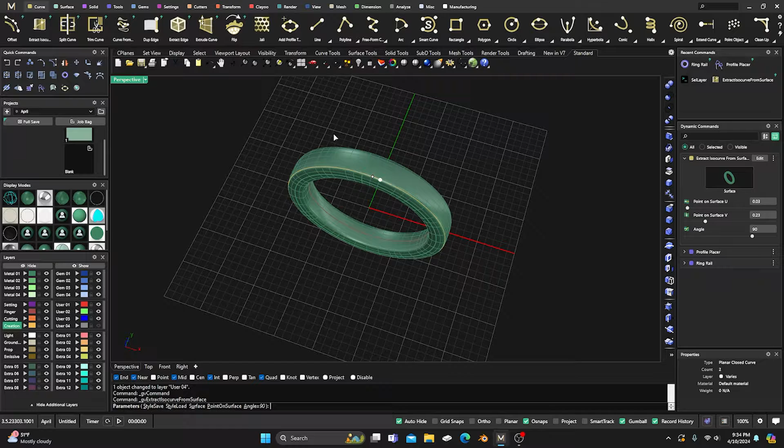Let's go to our yellow and go to curves, and we'll extract an ISO curve right here. Extract ISO curve, and we'll put it in our center at the 0.5.

And then we'll go in and grab some gems. We'll go to gem on curve and select our curve, and then hit enter, and it'll place our gems out there.

We'll just go ahead and click on this dot right here and type in 0.75, and now it's just here. You can do it all the way around if you want, whatever.

We'll go to round, and we'll go down here to just straight baguette, right? And then we want to get these baguettes where we want them. We'll drag this out to maybe 2.25, and we'll close up this.

It's a 0.1. Actually, that's probably what you want, a 0.1. But we'll take them a little closer here.

And we'll go ahead and slap them down to our table here, and we'll take them in a little bit further too, just for...

Let's go to ghosted mode. Let's see, let's go to wireframe here. What do we got here? Yeah, that looks okay. Somewhere like right around in there. And then we'll just select that.

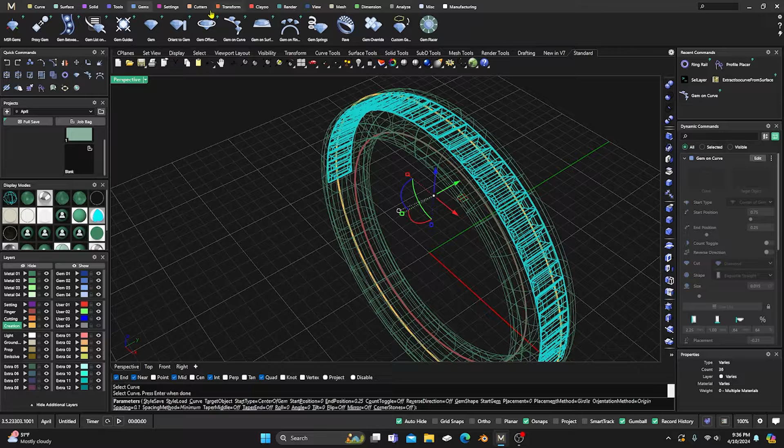We'll select our gems, go to cutters, and we'll put a channel cutter on there. And of course, this one you definitely want to change it from round to flat.

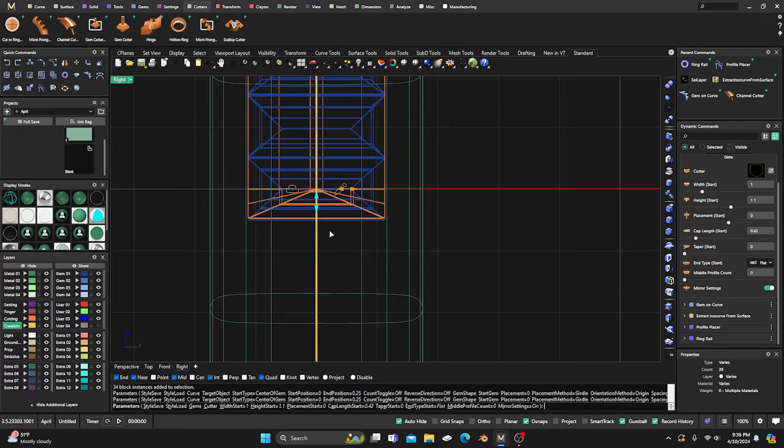Because you don't want rounded on a baguette band. We'll take this in to where it just barely covers up there, and we'll bring in our width.

So it's about 88%, 80, about 90%, somewhere around here should be okay. And we'll go ahead and change this cutter something a little straighter, but not real angled, right?

We want it pretty much, yeah. And we'll bump this out just a smidge. All right, so it comes in just a little, so this will go right along the edge here, and we got a little bit to cut there.

And we need to go to our front view, and we'll drag that all the way up, and then bring it down something like this here, and get it ready for our cutting.

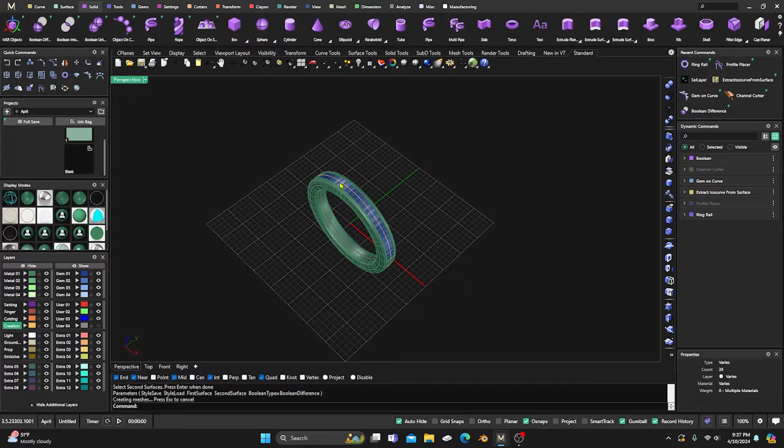And I think that should be okay. So we'll go ahead and take that. We'll give it some shading here, go to our solid, go to Boolean difference. We'll go from here, enter, and enter, right? And we have our baguette band, right?

Last thing you need to do is just go ahead and put cutters on that, but we won't do that right now because we're going to put baguettes in there, right? Tapered baguettes.

So let's go ahead and take this, and we'll go ahead, hold down Alt, and duplicate this over to here, right? Just get it out of the way here.

And let's go ahead and take these, and we'll change them to this layer here and turn them off. And the reason why we didn't make that cut is because we're going to need a curve in there.

So we're going to take that yellow and go ahead and change it to gray and get rid of it. And we'll take this one for right now and just hide it.

Okay, so we want to extract a curve from here, but we want to go all the way over to this end, right? So this is surface, so it's three different surfaces here.

One, two, three, well, four, five different, at least four. So we want to make sure that we can get everything all lined up, right?

So this one might be a good one to use, the old extract ISO curve, and then we can go in here, switch it to our V direction.

And then we can just snap it right there to that end intersection, right? So we have that one in there, right?

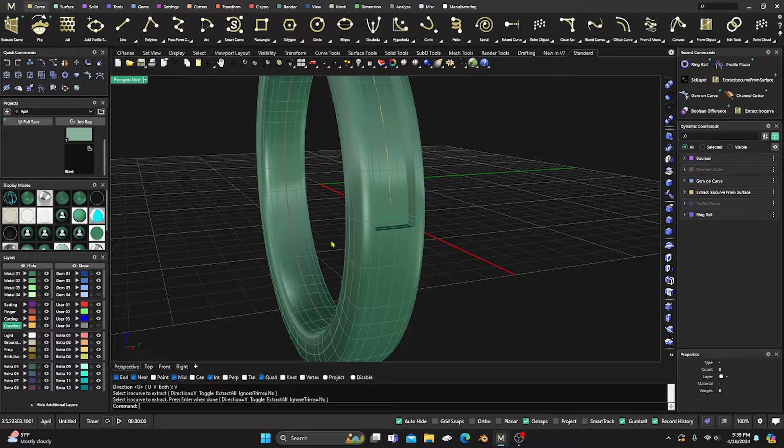And I don't think that you can mirror this over. We'll try. I don't think it'll work because the surfaces could be just minutely off, and if they are, it won't work. But we'll go ahead, we'll try.

There it is, okay, so we have that. Let's go ahead, take all our yellow curves and join them together. Let's complete that. Okay, it worked.

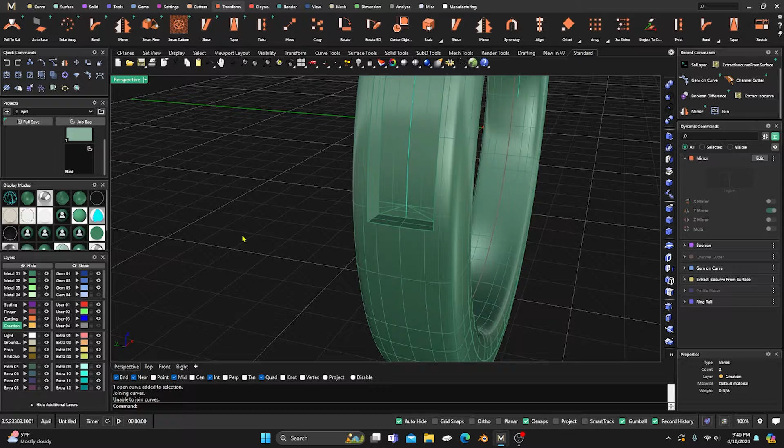Let's see, two curves joined into one open curve. Okay, so this one did not join like I thought. Well, we'll take it, we'll try it one more time just to make sure. This curve here, and we'll try to join. Unable to join. Yeah, that's what I thought. You'll have to extract it.

So let's go ahead and just get rid of this one, and we'll go back to extract ISO curve, select this surface here, and we'll do right there. Then we'll select that one and select this one, and we'll join those together.

Two curves joined into one open curve, so it's all one curve now, right? So what we can do now is grab that curve and go back to make sure I grabbed it. Ding, there we go. Type in L-E-N-G-T-H, length, yes, and it gives us that length of that curve.

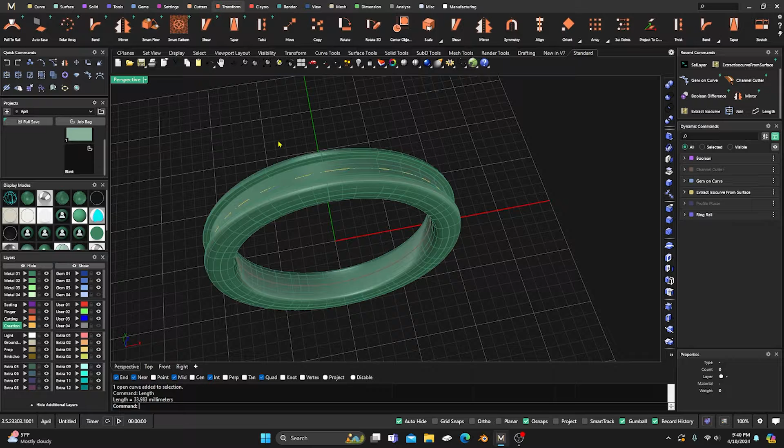So what we want to do is grab another curve, just click it anywhere in space out here, and then come down here and highlight this number, copy, come back down to the line, right click and paste. Oh, I locked it in the wrong direction.

So let's go back. Let's go to our line curve. We want to just click anywhere out there, and then we'll scroll till we get this here. Copy, come here, paste, and then just draw it straight out, right? Holding down shift and lock it in, right? We'll take this one and bring it over to this side here.

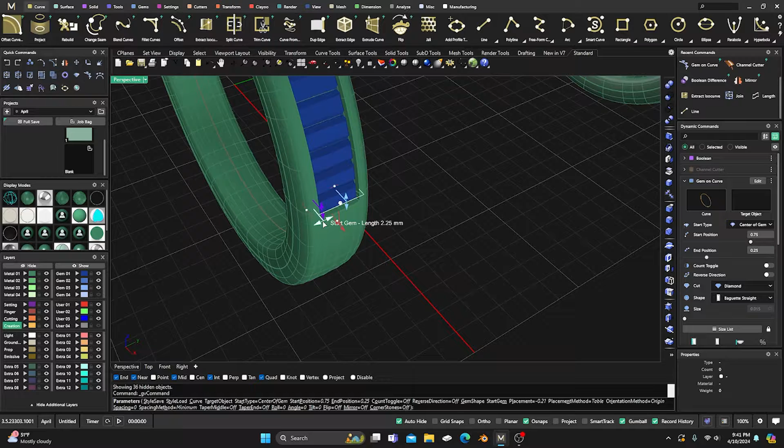All right, so now we have that, and I think our original ones were 2.25, so let's bring that back real quick because we want to take a look at this. We'll go to our gem on curve and do an edit, and put them out here where they were originally, but that's okay. 2.25 by 1, okay, so I'll back out of that. We don't want those. 2.25 by 1, I'm going to make a little mental note of that.

2.25 by 1, right? Okay, so what we want to do now is just go and grab a gem, right? We'll go and grab a gem, and we'll go ahead and change that from a round to a tapered baguette. And then we'll take it to, let's see, we can probably just type it in over here. Yeah, you could, we'll just drag it in. 2.25. And we want, by 1, so we want to take this to a

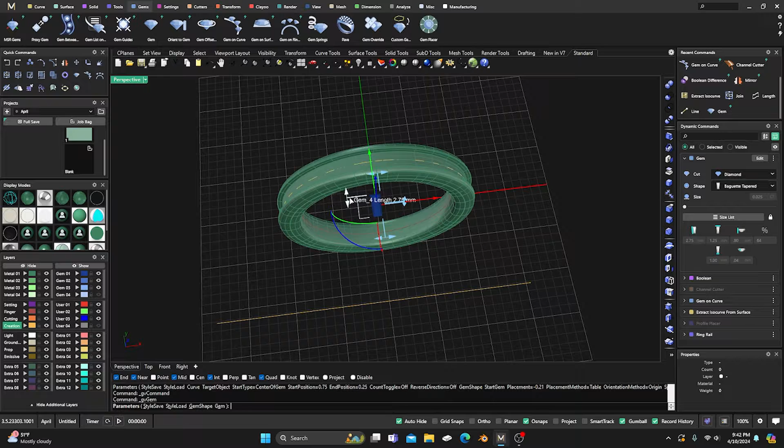0.5. 2.25 by 1, 2.25 length by half, right? So that's what we want.

Okay, so we'll take this and go ahead and go to our wireframe. We'll go move, and the reason we're doing move is because we can select right there in that mid, and then just bring it over here and snap it there, right? Okay, so we have it over here, and let's make sure it's on our line. Yeah, we'll bring it down a little, something like that. And then we'll take this and dupe it by holding down Alt and grabbing one and bringing it over. And then we'll click on it and flip it 180 and hit enter.

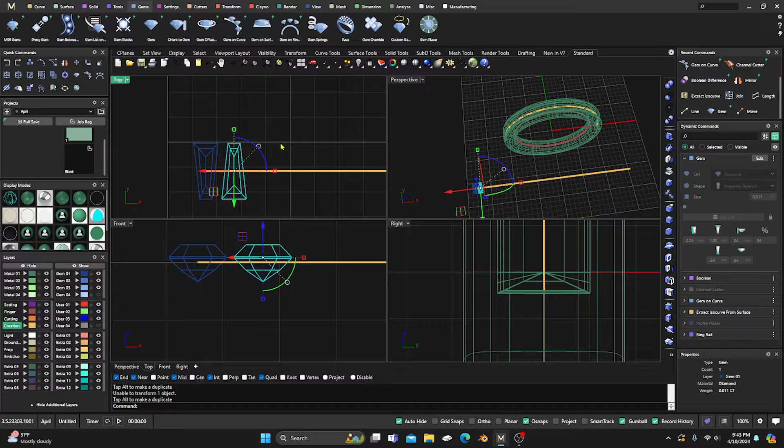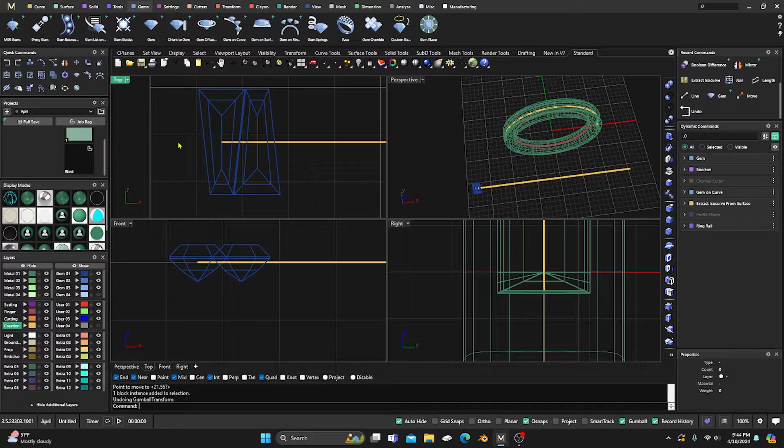And then we'll do another move, and we'll take it from that corner there to that corner and click. Now we're going to take it again and click there, type in a negative 0.01 maybe, just so we get a little bit of space there. Maybe you could take a little 0.02. So let's just go back one real quick, click on it again, go to negative 0.02, hit enter. So it just gives us a little bit of room, right?

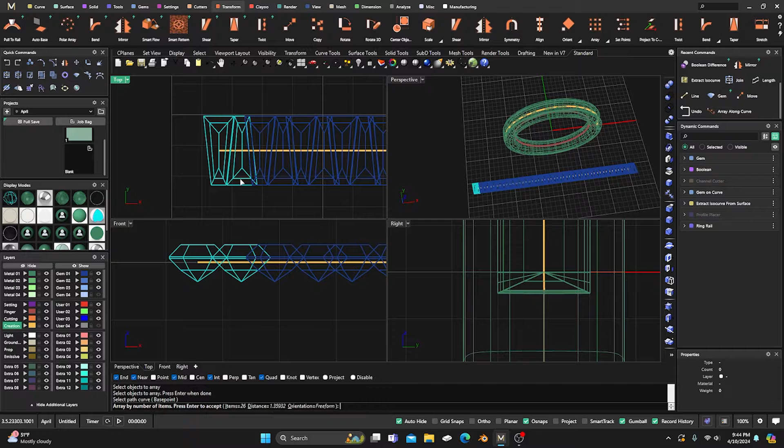Now we can go to transform, and we can go to array along curve. We can select these items, select objects to array, press enter. We'll hit enter, select path curve, that'll be this path curve, and it'll lay them all out there. And there's way too many, it looks like. So we'll come here to 26 and type in 24 and hit enter.

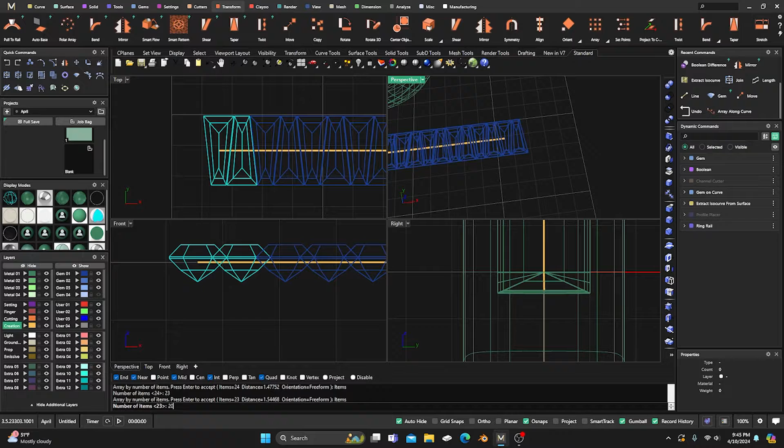Still a little bit too many, so we'll come in and type 23 and hit enter. Still a little too many, so we'll just drop it down big time here just to get going. 20, no, and it gives us a spacing difference, right? So let's go ahead and bump that back up to maybe a 22. And actually, let's take it to a 23. There we go, all right, so that's good.

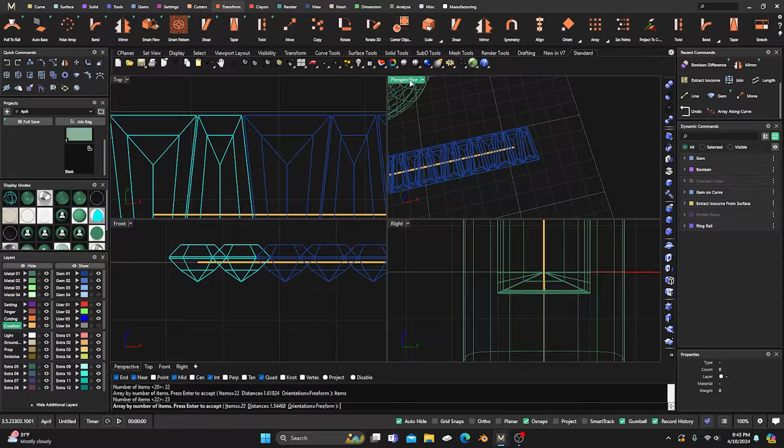Okay, and it looks like we have maybe one too many there. And it looks like, yeah, it looks like they're all pretty decent. Let's go to top view here real quick. That spacing, yeah, yeah, okay, so we've got these out here.

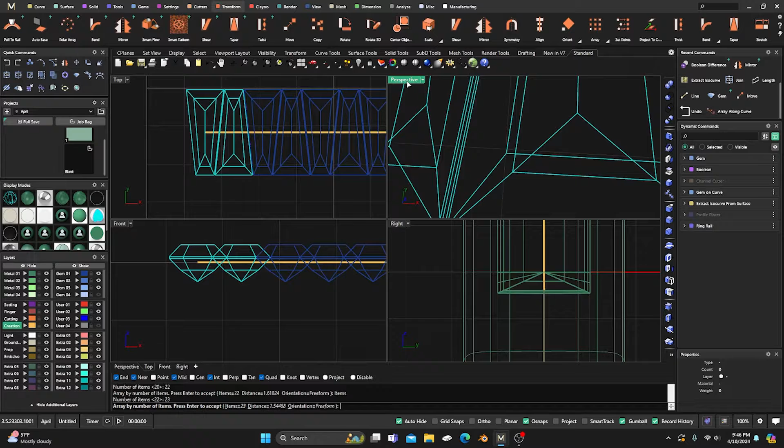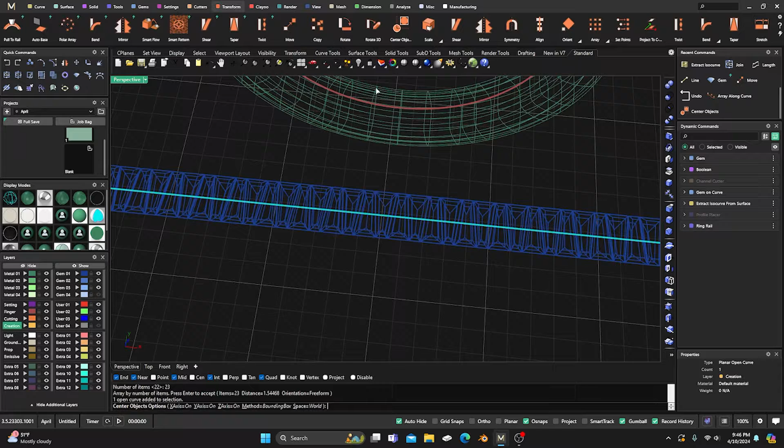Now these, what we're going to do is just leave them like this. It's a little bit longer than our curve, but we can adjust it by just changing our cutter up, right? So it'll be a little bit longer than what we wanted, but I don't think it'll be that bad. So let's go ahead and take that curve and put it right in our middle, so let's center it up. So it's in our center, and now let's drag it back out so it's right in the center here. Okay, let's go ahead and select all our blue stones real quick. Not this, let's go ahead and hide this. Don't want to grab that.

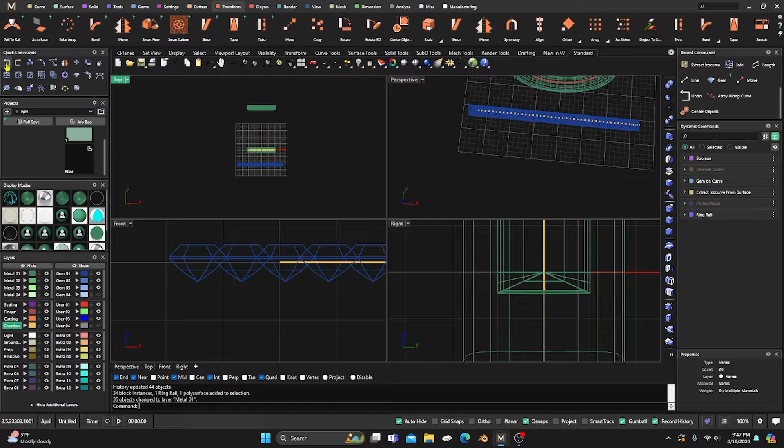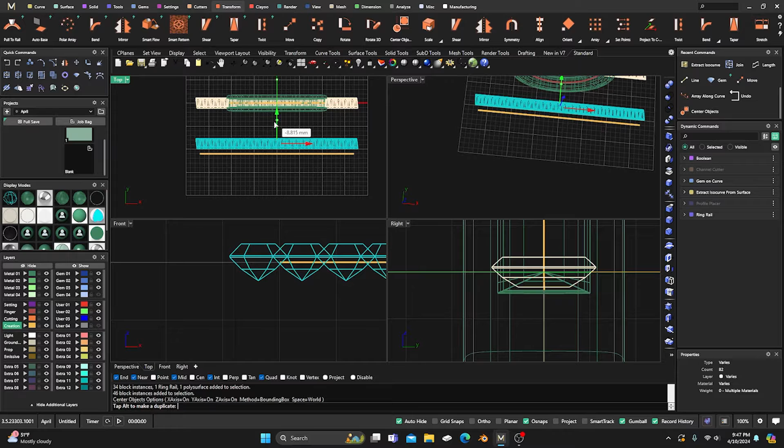Let's undo that last one. Let's take this and hide it. All right, so let's take these and let's go to center, and then let's drag them back out to our curve. All right, so now what we can do, if they're off, we can always fix it, no big deal.

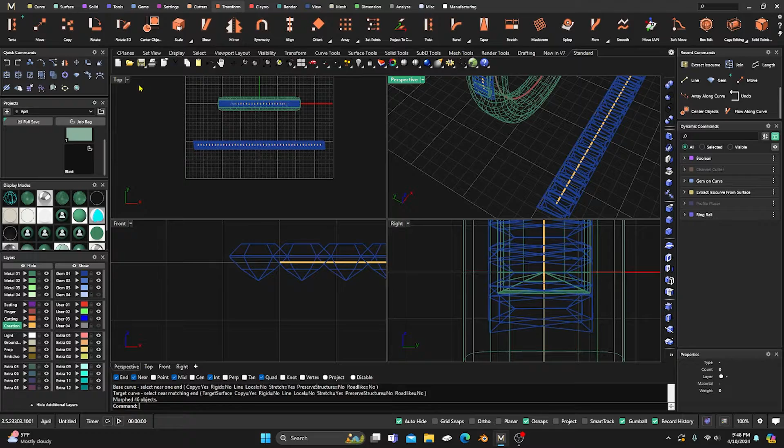We can go to flow down here on the end, right? Flow along curve. So it's going to say select objects to flow, and that's all these blue, and we'll hit enter. Base curve will be that curve here, and our target curve will be this curve here, and then flow them up there, right?

And we're a little bit off there, right? But that's no big deal, because what we can do is we can come back over to our cutter, go to edit, and then we can just edit that cutter a little bit. That's our cap.

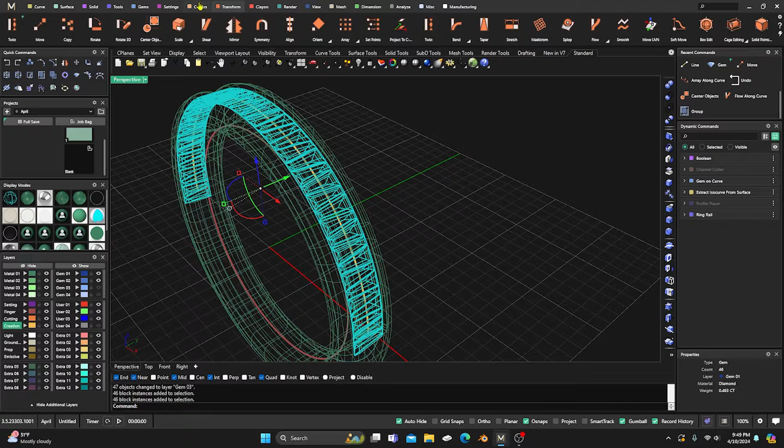Well, we can just, let's back out of that. Let's just go ahead and select our gemstones. Let's take these, change them to this here and hide them. Now let's go ahead, select all blue. Let's group them together. Let's go in here, group that group, go to cutters, go to channel cutter, and there's our cutter, and change that to flat.

And let's swing it around this side here. And we can bring this in. This will stick in a little bit deeper, but we want to get this side leveled off there, right? So that'll be okay. And then we need to thin it down a little, something like that, and we'll hit enter, and we'll give it some shading.

Oh, I didn't check my depth there, did I? So let's go back to edit, wireframe. Oh, let's change that cutter like the other one here, and we'll drag it all the way up, drag that down, something like that. Give it some shading, and we'll do a boolean here.

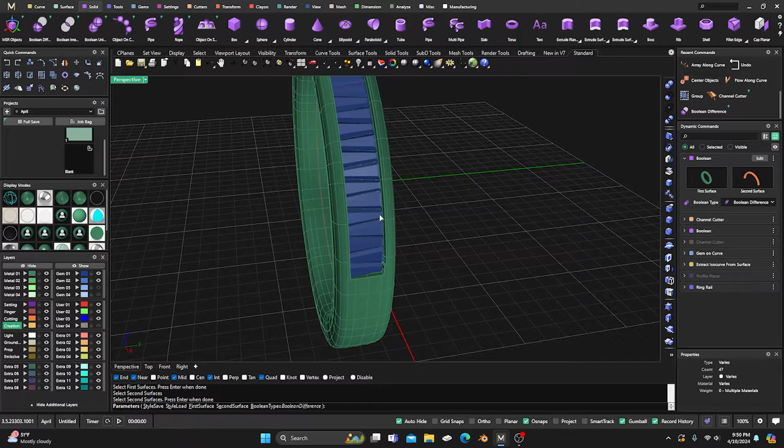Excuse me, tools, no, solid. Let's see, boolean difference, this surface enter, this surface enter, and now we have these out here, right? And we had a little bit cut, so it's probably best what we do is just go ahead and delete this one and bring back our curves here and do that sweep one more time, because we had the other one out there, right? So we'll go to surface, sweep.

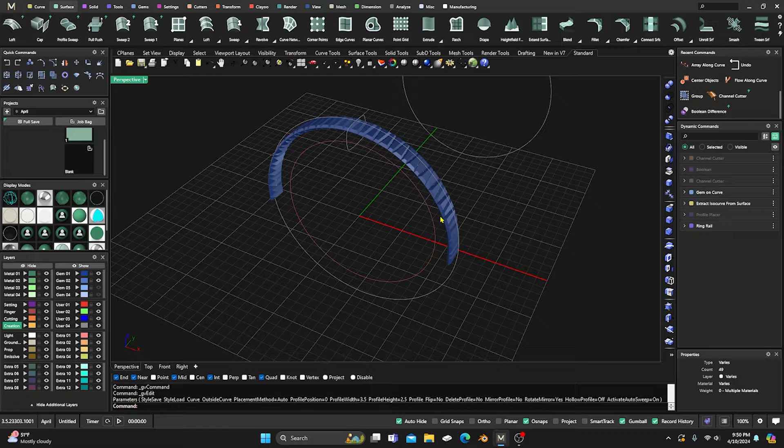Well, we can just select the profile, and then enter, auto sweep, take it, it's putting it over there. Okay, so let's change to this color, and let's do a Sweep 1. And then let's bring back that cutter. And it should be all set up already.

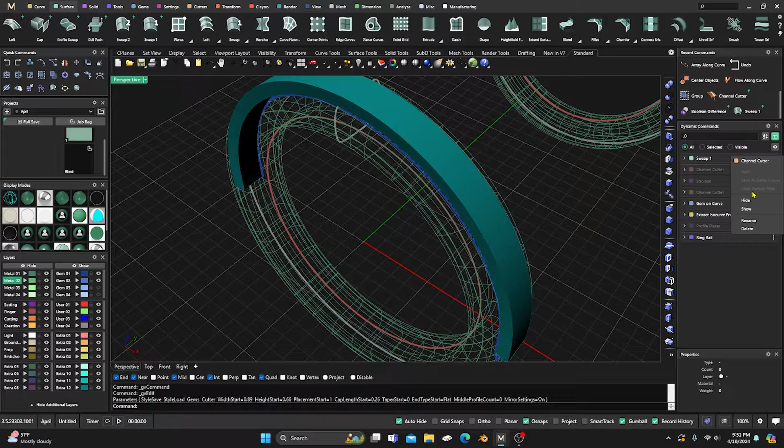Yeah, we'll go there. And so we need to show that cutter. Go to here, and then we'll do that boolean difference. Enter, enter, enter, and now we have both of them out here. And we're, well, just do our cutters, gem cutter.

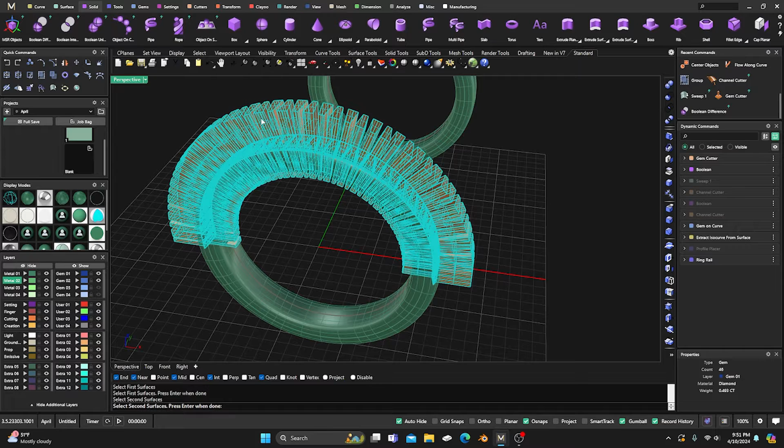Now here's something that you should probably be aware of, is after you get it set up, you're going to have to make sure that they're not overlapping, because if we try to do it right now, it probably won't work. So if we go to our solids and try to do a boolean difference in here, first surface, second surface, enter, it'll probably blow on us. Yeah, well, it worked, I'll be okay. Well, sometimes it does. Just if it does blow, you'll have to adjust those cutters so that they don't overlap.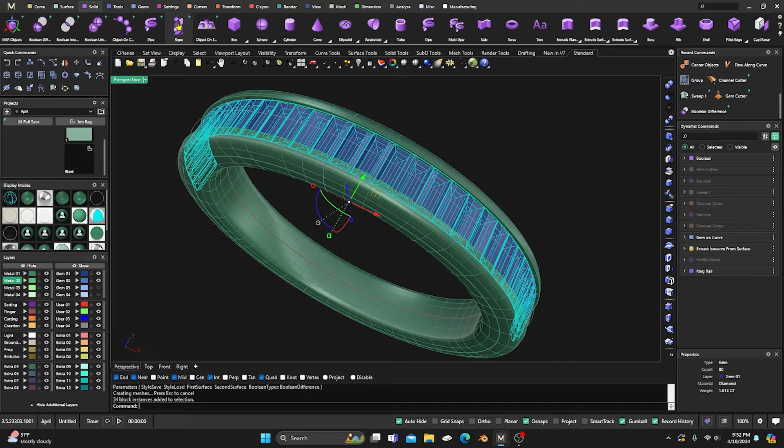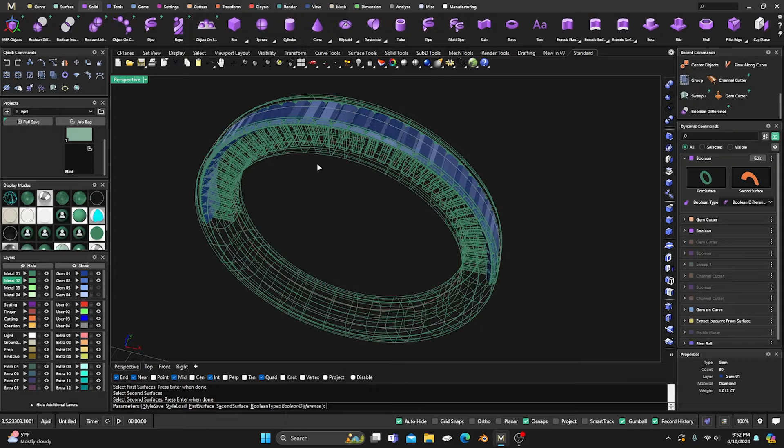So let's go ahead and try it on this one here. This one here is all the same size. So let's see if it blows on this one. Select cutters on that. All right, so I'll take those up just a little. We'll take those, we'll do the solid boolean difference, this surface enter, this surface enter, wait for it. It's a lot of cutting there, and enter. Okay, so it worked on both.

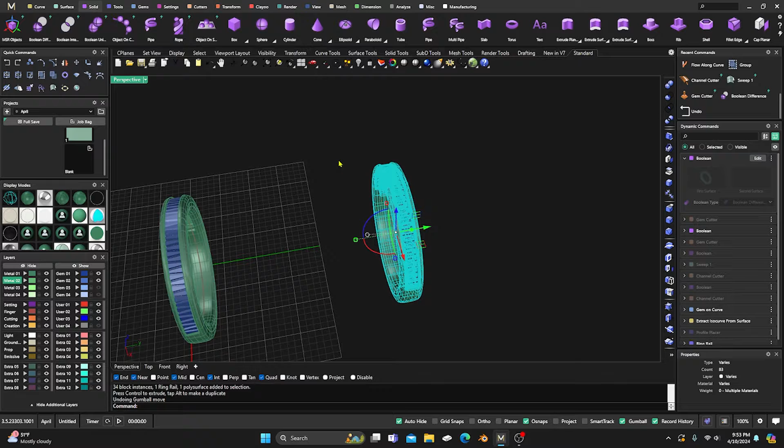We can get rid of this one here, turn it to gray, and we should be good to go. And now we have one in a solid baguette. Okay, so let's go back. It's froze up on me. There we go. Take this. We'll just do another alt copy, and then we'll just get rid of this one. And we have both these. One tapered, one not tapered.

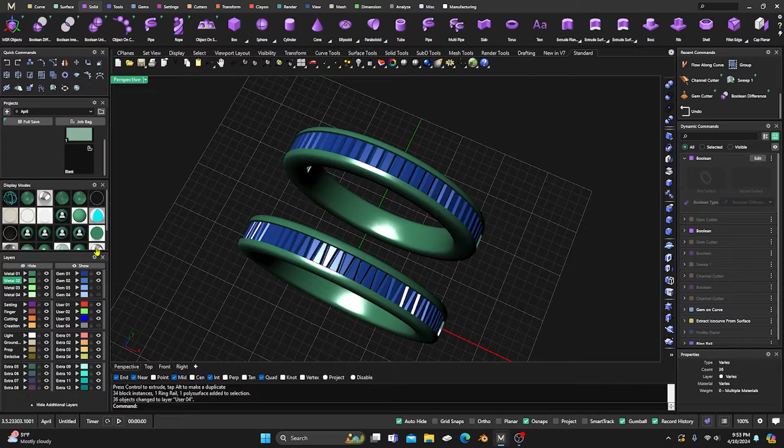There you go. The curve, when they're going around a curve, it's going to take a lot of extra tapering and you're going to have to be a little bit more cautious. And right now, MatrixGold, I do not believe have something that really makes that easy.

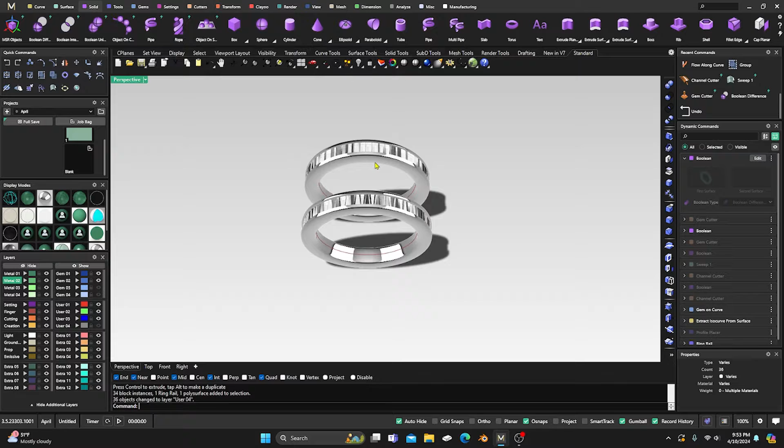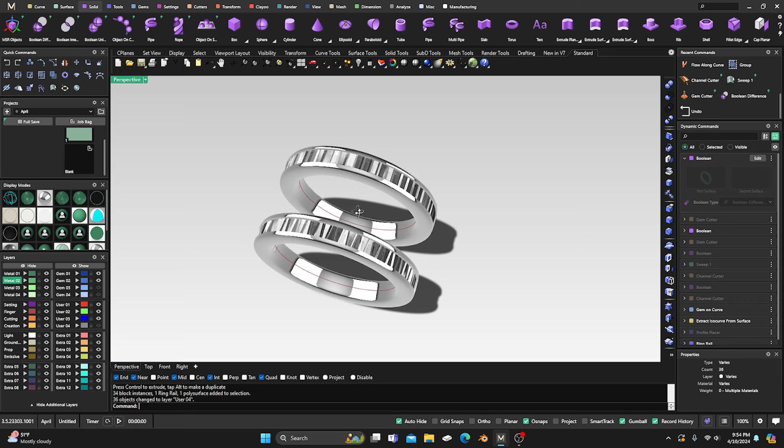In Matrix 9, they had a taper builder. And also, I think in Grasshopper Gold, there is a builder that could be used for that too. So I'm going to look into doing more of a swirl where we have to really go in there and change all the stones up at a later date. But for now, this is what we've got for Baguette items.